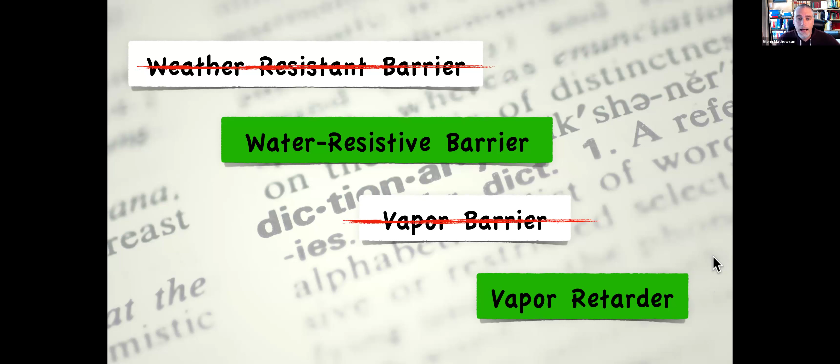Weather resistant, water resistive barrier. Let's start there. Codes have been around for hundreds of years, so in the long timeline of code, this is something relatively new. In the 2006 IRC, we got the definition for a water resistive barrier. You can read that on your own while I'm talking.

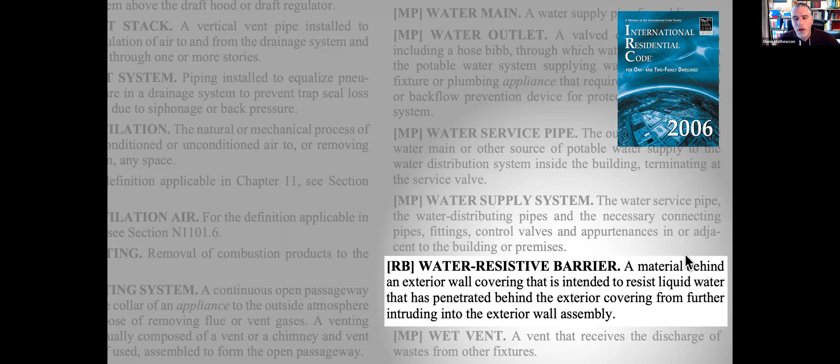But of course, you can hop into chapter 2 after this is over and read a lot of this for yourself. I always encourage you, any code that I bring up, write down a quick section number and go read it later on your own. I don't do a ton of just reading you the code, even when I bring up language like this. So here we see the section related to water resistive barriers.

And this is what we're going to find in the 2021 IRC. There were some significant revisions to this section for the 2021 IRC. So you get lots of details about how to install it and some other references. Again, read those things on your own. You're all professionals on this line, most likely.

What I want to talk about here, we've got these four different options. And the code is full of choices and options. That's something that, when the public doesn't dig in and learn the code for themselves, they love to use that line: the code is the worst you can build and still be legal. And as someone that truly understands the IRC, I find that to be somewhat of an ignorant statement, not really just not knowing the code.

Because if the code is the worst you can build and still be legal, my question is, well, which of these four choices that the code user can make, which one of those is the worst? So it just kind of doesn't make sense. The code gives lots of options and choices to those that choose to see the opportunity it provides.

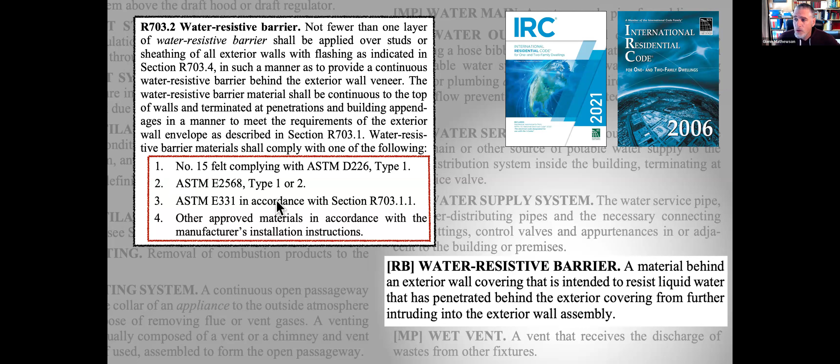So the first choice here that I want to talk about is number 15 felt, because this is, I guess I would say, the prescriptive method. This is the cookbook method, the simplified recipe to just build a house for your family or to sell to another family. That's a material you can buy at most lumber yards, home improvement stores, or construction suppliers across the country. And it's also very much a historical product as well.

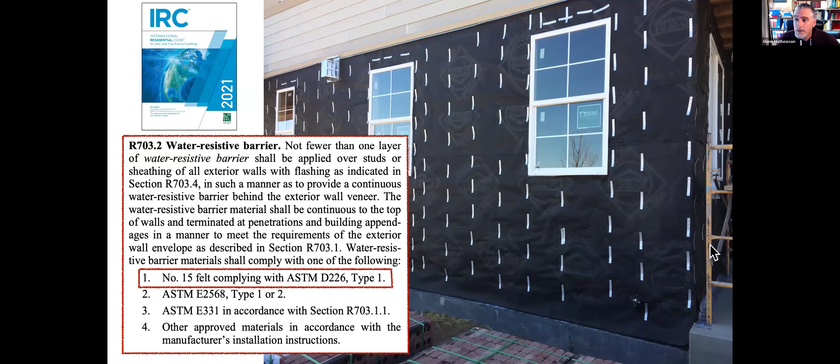And then we get into the other options, I'll talk about those in just a minute. So, number 15 felt water resistive barrier, right? I said this is kind of the historical product. So let's go back and look at this document I have that was published by a few different agencies and departments of the federal government back in 1950.

And look at the title of this book: Condensation Control in Dwelling Construction. Sometimes when you talk about building science and vapor management and vapor control and all this energy code stuff, it's gotten a lot of attention over the last decade, two decades. But it's not new. Here's a book about that subject, controlling condensation, from back in the 50s.

Just because the information was there and the research was put together doesn't mean that information was out to all the people and has become a mainstream understanding, which is why here today in 2025, I use this as a reference to kind of point back to a little bit.

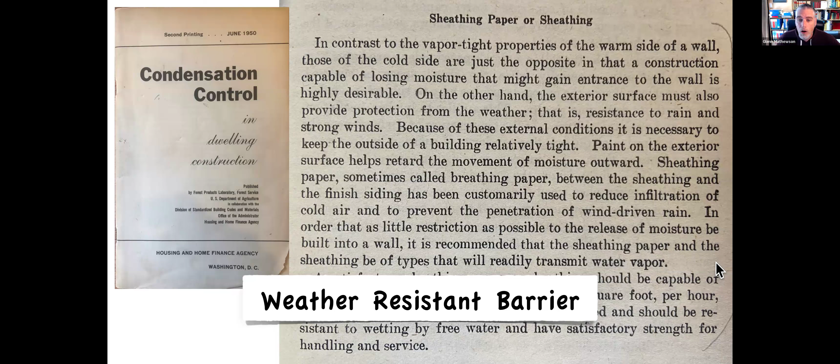So here's a section on sheathing paper, right? This is your felt paper, your tar paper, your water resistive barrier, as we would call it today. And I like this little statement. It gives us a lot of clues about how this was functioning for us in the past before all these new technological advances in construction materials, all the polymer based materials.

Every day there could be a new material coming out that's very proprietary, based on chemicals and testing and interlacing of atoms and stuff way above my head. And how are we affecting things without realizing we're affecting things? That helps us if we understand, well, how were things before all these new products we have?

So you've maybe already read this statement: sheathing paper, sometimes called breathing paper, between the sheathing and the finish siding has been customarily used to reduce infiltration of cold air. Hey, that sounds like what? An air barrier, right? And to prevent the penetration of wind-driven rain. Hey, rain, like, the weather. So we can see how in the past, this sheathing paper, we were sort of relying on to do quite a few different things than just today, where we kind of focus on just the water resistive barrier.

And we have all these other methods of creating our air barriers. But here we see 1950s. Yeah, we didn't want leaky homes either, right? We didn't want homes leaking air, but we wanted them breathable with breathing paper.

And that's one of the things, another point I'll try to get off in this class, is so many people compare a house, an airtight construction for a house, and they say, oh my gosh, that's horrible, this can't be so tight, a house needs to breathe. And they're relating the house to a living organism, right?

Like a human being breathing. How do we breathe? We breathe air, right? But isn't that kind of a bad comparison, to compare a house, a shelter for a living organism, and then try to compare that terminology to the living organism itself? So, as we're going to see here in a little bit, I don't think that's a good comparison.

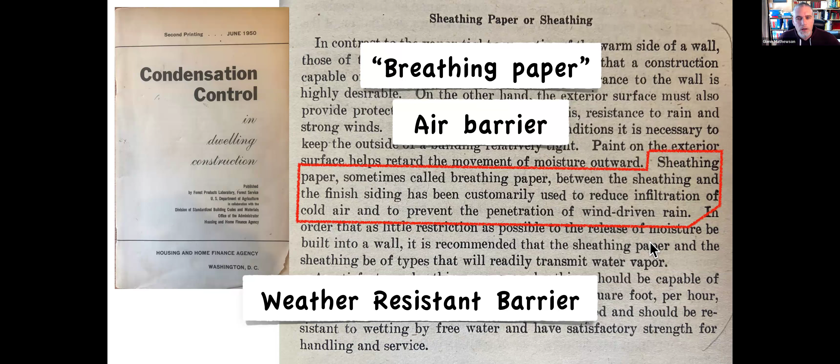It will allow water vapor to diffuse through it, and it will allow our sweaty bodies to dry via water diffusion, vapor diffusion, as opposed to air movement. So my goal to drive into you guys today is, yes, a house needs to breathe, and it can be as airtight as you want it, because a house doesn't breathe the way a human breathes, right?

So here we have 1950s, put on your weather resistant barrier. It's going to do all these things for us: prevent wind driven rain, act as an air barrier. And then as we get through the evolution of code, we can find kind of a strange one in the 2000 IRC in the section on siding. And suddenly it tells us now no sheathing paper is required. There's a various number of sidings here where it'll tell us no sheathing paper required at all.

When I jumped into construction in the late 90s and moved on to framing homes and doing work for the home builder, we were putting homes in Arvada. We were building homes with OSB sheathing, and we just put the window right over that piece of Z metal flashing on the top, and then put masonite siding directly over the OSB. No water resistive barrier, no sheathing paper at all.

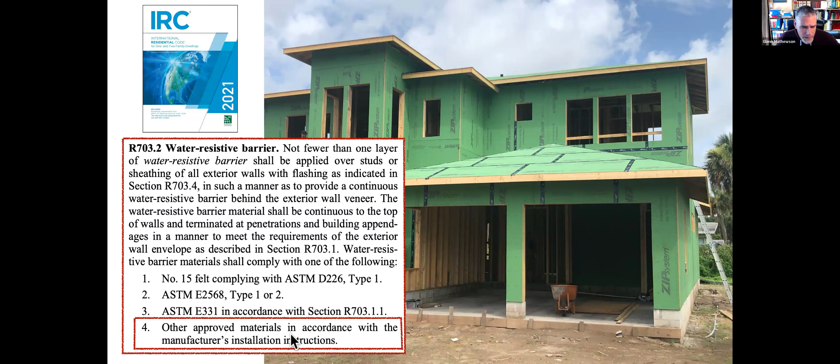Well, approved is acceptable to the building official. So what this means is, the way I like to present this is basically like a now hiring sign. The code is essentially saying, hey, currently on staff here, we have number 15 felt, we have windows and doors, and we have EIFS systems. And they're all performing the job wonderfully for us to provide a water resistive barrier.

But we're always looking for new staff members to join our team, right? Now hiring. But what are we going to do if we were hiring a new staff to the building department team or to your design firm? You would want to find out what their qualifications are. You would say, hey, can you provide me your resume?

Right? So the building official would want - what would make it acceptable? Well, show me your qualifications. Show me your test information. Do we have a standardized ASTM test? Is it referenced in the code? Is it not? Do you have alternative tests, like through ICC-ES or through other providers of code compliance testing and reporting? And so then the product can show you that resume that they're qualified.

This other way of doing it is qualified to do the job. And now as the building official, you can say, yes, you can join our team for this project and go ahead, you're a water resistive barrier. And then in doing so, hold on, there's other stuff we might want to think about, right?

The felt paper, well, that was conventionally an air barrier as well, right? It would keep infiltration of cold air. So it might be a good time to go, all right, what other features, how is this alternative functioning in these other applications that the standard materials...

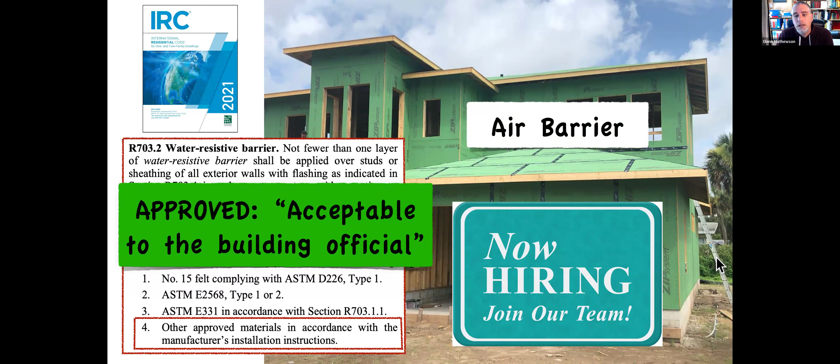have been functioning for us since the 50s or before. So is this material an air barrier? Yes, no, that's for you to find out in reviewing the resume and how that then plays in with the whole design of the exterior wall assembly.

And what about breathing paper, right? If suddenly we're shifting from using a 15-pound felt that is a breathing paper allowing moisture or water vapor to pass through, are we going to be doing something? Are we going to create any negative effect if we replace it with this other product, this other material? So it might be good for the designer to find that out, to ask the question, hey, how is this affecting air movement? How is this affecting vapor diffusion?

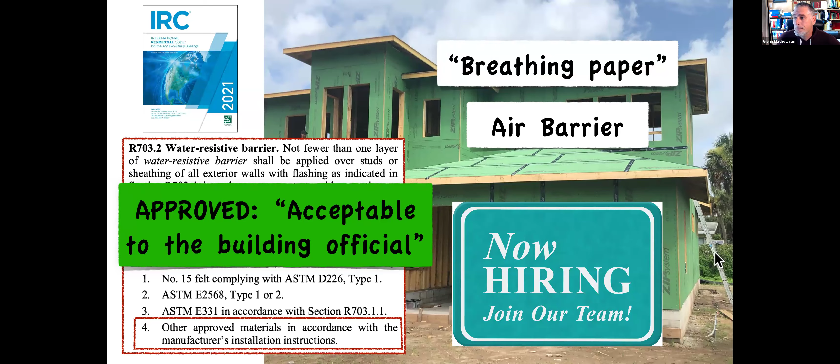So there's some little tidbits on the weather resistive barrier, the water resistive barrier, and what other functions it might be providing or could provide. Next up, we have the vapor barrier, now vapor retarder. Like I said, from the 1950s you can see here, that was the term vapor barrier, vapor barrier, vapor barrier. And that's still a term used today in a lot of non-code professional conversations and professional documentation. And that's okay, but in the code we don't use this term anymore.

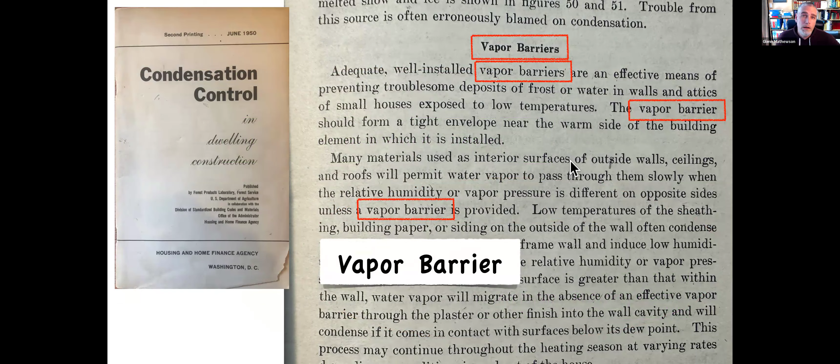So let's talk a little bit about vapor barriers, vapor retarders, vapor diffusion, in a very quick nutshell here. There's this website I've found, dpcalc.org, but you can find lots of websites that provide little dew point calculators. This is just a very simple dew point calculator.

68-degree air temperature, that's the temperature of the air. I set it at 68 degrees because that is the minimum required heating for habitable spaces since like the 1992 code. So that kind of gives us a code-based example temperature, right? We've got to at least heat the home inside to 68 degrees. And then you can set the slider here for the relative humidity, and I set it at 45%.

And I got that from the ASHRAE Handbook of Fundamentals. They have this chart that they've adapted from some health and medical science and documentation. These folks, in a whole different lane than me with code, have said to us, hey look, if it's too dry or too humid, you create worse environments for all of these things that we don't want to live in, these environments that aren't so good for the occupants.

And so if you look at their range of the optimum zone, very center of that is 45% relative humidity. So that's why I've used that over here in this slider. And what that results in is a dew point temperature of 45 degrees, saying if 68-degree air at 45% relative humidity touches a surface that's 45 degrees or colder, it's going to now be 100% relative humidity. We're going to make that air colder. The air can't hold the same amount of water anymore, and we're going to get condensation, which is not what we want.

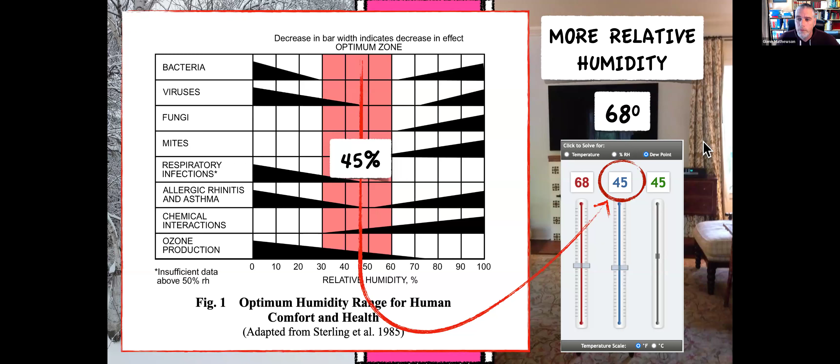We don't want liquid water forming inside of our assemblies or absorbing into our wood materials inside our assemblies. So if we look at an old-fashioned, just typical wall dating back to the 50s, you've got some gyp board on the inside, you've got some sheathing on the outside, and these are just example numbers. 68 degrees inside - it's more. We have more relative humidity inside than we do outside.

Outside it's cold and it's drier, and the colder air can't hold as much humidity either. And so we can see we have this temperature gradient through the wall. One side of the wall is 68, the other side is 30. This doesn't just happen at some single magical point; this is a gradient of those temperatures. As you move through that wall assembly, you're getting colder and colder and colder as you go to the outside of that assembly.

So here we have no vapor retarder on this. We're having vapor diffusion pressing up against this wall, and it's going to pass right through that material - lots of humidity, since we didn't have any vapor retarders or barriers. Now if we look in here, all right, we've cooled down the air, so I picked the number, say 56 degrees. Colder air won't hold as much relative humidity, so that means we would actually have more relative humidity of the air. But we probably did block or slow down some diffusion through here, so I've kept it at 30 just to keep this simple. We can see how the colder air has lowered that dew point temperature down to 25 degrees.

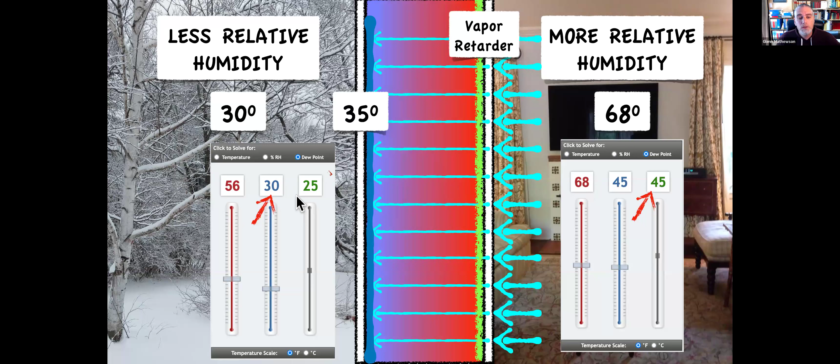This means we can now tolerate a colder surface. And that's a good thing, right? Because if that humidity hits those cold surfaces inside of our walls, we're going to get the condensation. So now we can tolerate a colder temperature. And look, it's not that cold, it's 35 degrees. So great, no more condensation, right? We controlled the condensation.

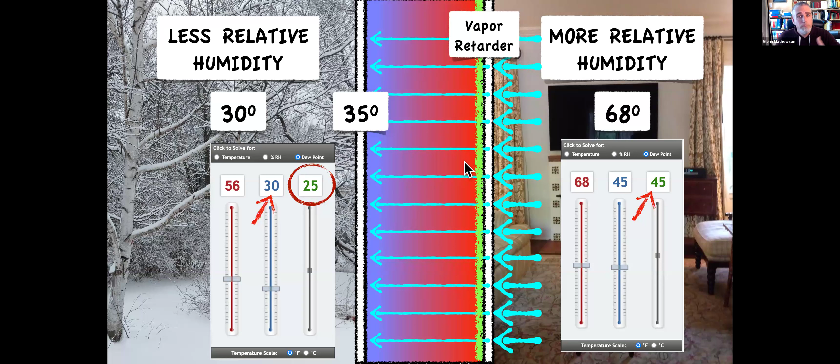And that was working in the 1950s because look, there's not much other stuff to this wall, is there? There's no continuous insulation, there's no spray foam, all these things that change these properties of permeability compared to what we were used to with the quote 'breathing paper.'

So we can come in here, we can see now in the 2021 IRC, we've got vapor retarder classes, and we've got 3 classes of vapor retarders. And I'll take you through and show those in visual form in just a minute.

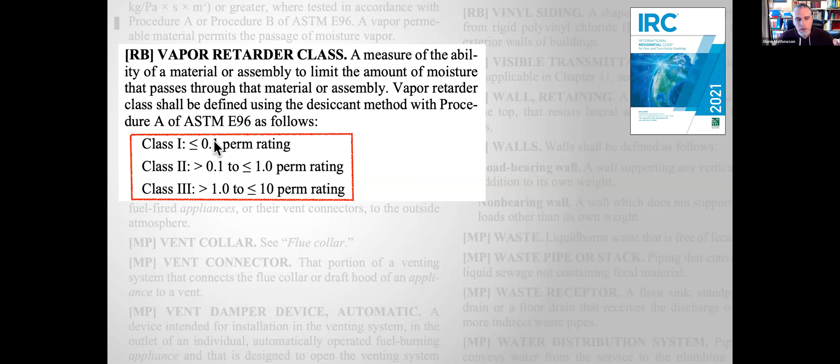But I want to point out an important thing here. Anytime the code refers to a class of vapor retarder, class 1, class 2, class 3, that immediately tells us that the perm rating, the permeability of those materials within these ranges, was determined using the dry cup method of ASTM E96. There's a dry cup method where it's testing the material in a more dry environment, testing it going from 50% humidity to 0% humidity, and then moving through the tested material.

And we'll see here in just a little bit, there's also a wet cup method. And that tests material when it's in a more wet environment, moving from 100% humidity down to 50% humidity. I've got another slide to get into some details there.

So this is when I bring up one of my little bumper sticker sayings, my little quotes in code. And one of my sayings is, test standards support freedom.

So back in the old days, it would tell us exactly what you needed to use. It would say, use 15-pound felt, use a poly vapor retarder, a plastic-based vapor retarder, things like that, giving you only one choice of material. And that doesn't really promote much freedom, right?

But a test standard says, hey, go be innovative, go be creative, new technologies, new materials, new ideas—test them according to this standardized test. And if they can provide the perm ratings between these ranges, then guess what? The code says you're hired, come on board and do the job for us.

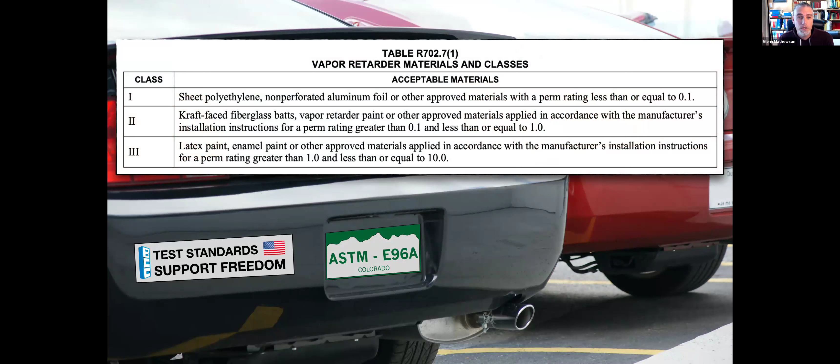So here's what we get now, though, in the 2021 IRC. We can see that we have more options in there: Class 1, Class 2, Class 3. And look, there's lots of stuff listed like sheet polyethylene or non-perforated aluminum foil, fiberglass batts, vapor retarder paint.

So it's still giving us an easy recipe, right? Remember, we're trying to build a basic home. It's like a cookbook making green bean casserole, let's just follow the recipe. It tells us to buy some of these materials. But remember, what does this say? Or other approved materials, other approved materials, other approved materials.

Remember that now hiring sign? In this sense, for acceptable to the building official, you're given a little help here on the license plate. How would you approve other materials? How would you review their resume? You would say, let me see the results of your ASTM E96 testing, let me see that you've got your material listed to that, and that you comply with that testing, and that's how you derived your different permeabilities, perm ratings, to get your class.

Okay, so yay, test standards allow for more innovation. And that's something, test standards promote freedom. Most people would think I'm crazy because it just sounds like another rule, doesn't it? Well, sometimes it's important not to just look at rules as restrictions, but see if sometimes these rules actually open us up to other avenues.

So these are my easy to remember terms for these different classes of vapor retarder. A class one vapor retarder is 0.1 perm or less, like poly, your sheet polyethylene. That's the classic vapor barrier. And this is where you're still going to hear folks outside of just the code lane referring to vapor barrier, and that generally now is going to be speaking to a class one vapor retarder, vapor barrier. But remember, by the code, it's just a class one vapor retarder. So poly, that's an easy thing to remember, but never forget the now hiring sign.

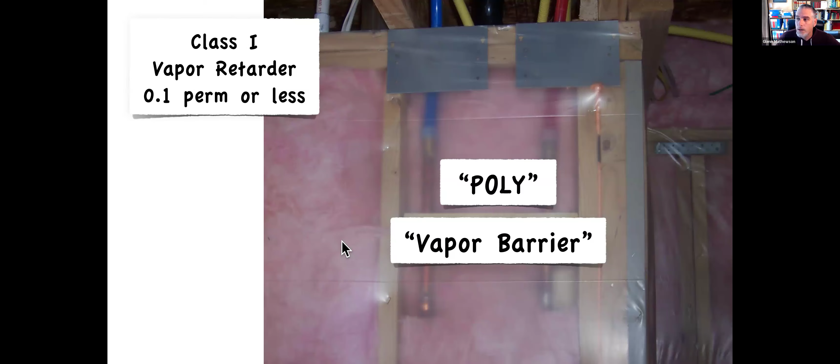And then our class two vapor retarder is greater than 0.1 perm up to 1 perm. And an easy thing to remember is paper, right? Poly and paper, easy to put together. But of course, the now hiring sign, never forget that.

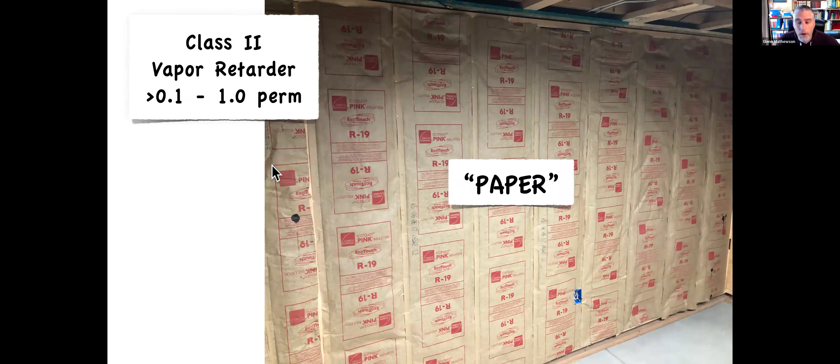In the 2000 IRC, here's where we have another thing to clue you into why there's a lot of disconnect. A lot of people have different opinions and different understandings of vapor control, and it has so much to do with this history and how these things have evolved. So if we were to go back to the 2000 IRC, we wouldn't have three classes of vapor retarder, we would just have one definition, vapor retarder. And in that code, a vapor retarder, or someone might have called it a vapor barrier, it was 1 perm or less.

And that means it included class one and class two back in the 2000 code. So where we've evolved, getting more specific, is we've now broken apart just vapor retarder as being 1 perm or less, into two separate categories. So now we can look at poly and paper separately. And this one doesn't tell us, in 2000, was it a dry method? Was it a wet method? Well, that doesn't help us a lot, especially with the movement and much more specification we have now on this subject in the modern code.

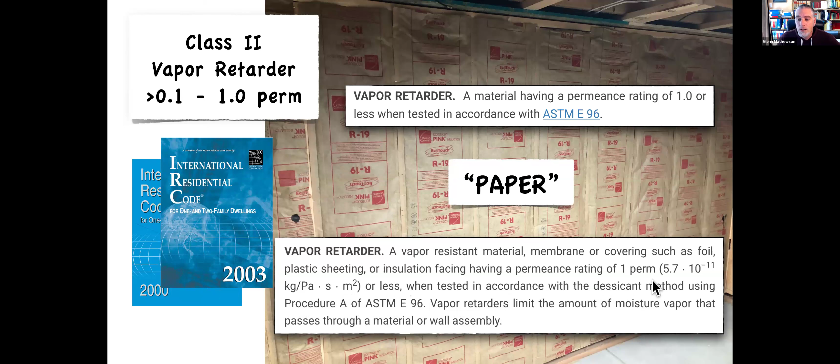So we can see in 2003, just a quick note, the definition changed again. And this is where we now see the reference to the desiccant method, which is also the dry method or procedure A. There's a few different terms used for that: dry cup, dry method, desiccant, procedure A. And so 1 perm or less. And now we can trace this history all the way back to that 1950s book.

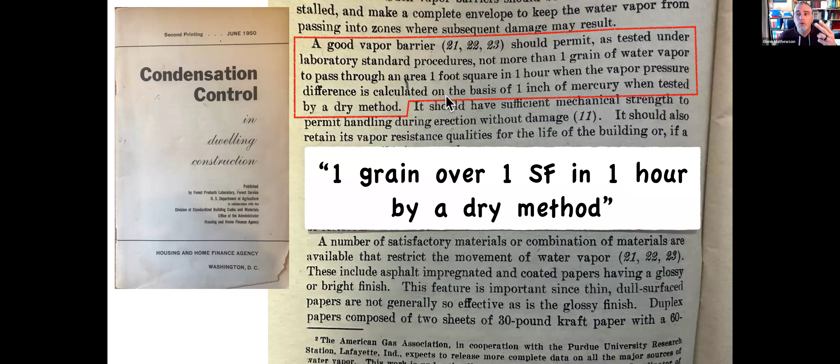Because what does it tell us here, right? A good vapor barrier should permit, as tested under laboratory standards — now we have a reference for that test, ASTM E96 — not more than 1 grain of water over 1 square foot of material in 1 hour of time by a dry method. So, in this time, and this might be in a lot of people's brains still, a vapor barrier, 1 perm, well that would be equivalent to class one and class two vapor retarders today.

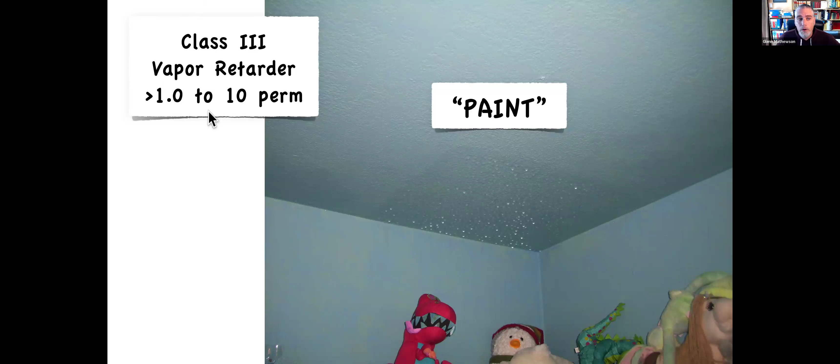Now for the biggie. The big change with this is recognizing paint as a vapor retarder. Paint, just a simple term. There could be other materials constructed to do a class three vapor retarder, but I try to keep it easy, right? Poly, paper, paint. So a nice summary to help you understand class one, class two, and class three. A class three vapor retarder, paint, that's going to be greater than 1 perm and then up to 10 perms.

Here's where I feel like I have to point you to this definition in the IRC. It's been in there since 2000, and it's about what does it mean to be vapor permeable. Vapor permeable means 5 perms or more, tested under procedure A or procedure B.

In my bigger class, I can explain that the IRC is Frankenstein's monster. It's been put together by parts and pieces of different people over different periods of time. We have stuff in the IRC from people living in the 1920s, before my father was even born, and parts of those people are still in this Frankenstein's monster of our IRC.

What I've discovered through my research is this really does not have any real relevance to vapor management in our building assemblies at all. This is kind of a dated definition in terms of its use in understanding parts of the code.

When you get to appendix chapters, like for straw clay construction and hemp-lime construction, you'll see a lot more discussion of vapor permeability. But those are new, just in the last few editions, whereas this definition is something that's been in there a while.

But something to keep in mind: if it's 5 perms or more, we're definitely seeing it as vapor permeable, even though between 5 and 10 perms we're still calling it a vapor retarder. You see how it's kind of hard to teach that without explaining that the code's not perfect.

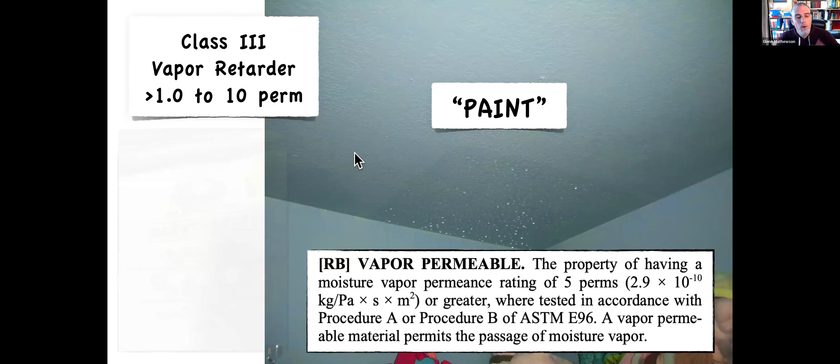Anyway, paint really is getting us to this idea of being breathable, being able to dry. When we're looking at the dry cup method, the classes of vapor retarder—class 1, class 2, class 3—under dry cup, being 1 perm or less for class 1 and class 2, the goal there is really to keep water vapor from diffusing into our assemblies.

But then we might want the water vapor to be able to move out of our assemblies and dry out, right? Just like if you're wearing a few too many clothes and you get hot and sweaty, you want those clothes to let you dry out. So the idea of paint is really pushing us towards this idea of drying, of getting back to being breathable.

This is a Google image search of a term. I love searching with images because it gives you a taste of what the general public is talking about with certain terms. There's this term that was coined not too long ago, a smart vapor retarder. That was the term coined by the public in sort of creating this concept. And someone said, well, let's get that recognized in the code.

So you'll see something coming in our 2024 edition of the IRC, a term called responsive vapor retarder. I encourage you to go read these definitions—you can read all the ICC codes for free at codes.iccsafe.org. So even if you don't have a paper copy or your own PDF of this, you can go read it online.

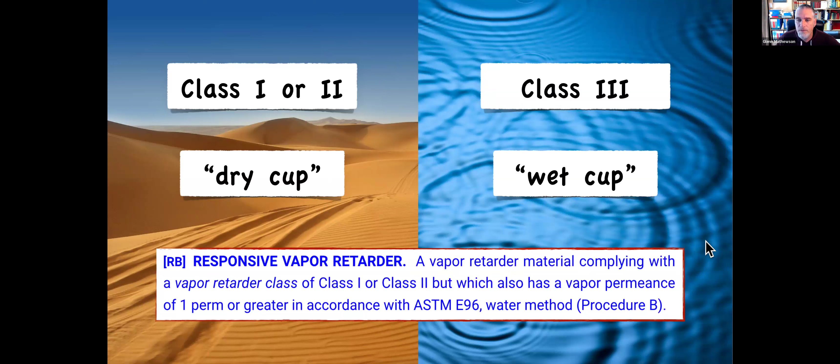So this is an important new movement we're seeing in this vapor control design. And that speaks back to that breathing paper, right—sheathing paper, often called breathing paper. If we look up the material properties of this material, we'll find that breathing paper is dry cup, 5 perms. Hey, isn't that the definition for vapor permeable? Even in a dry cup example.

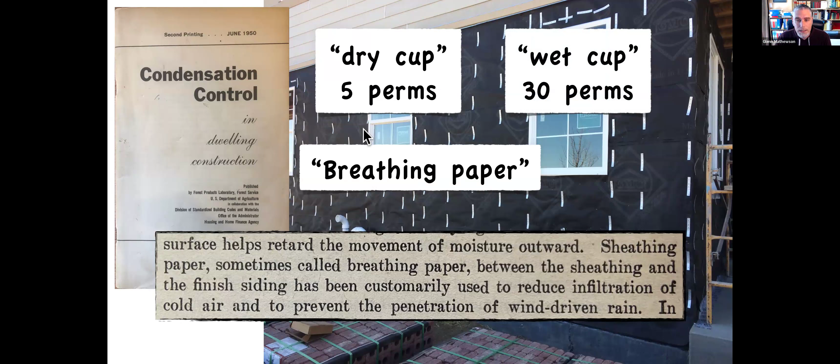But then in a wet cup example, hey, we got a leak into the wall, or somehow we got condensation in there. Now we got this wetness in the wall. That's going to open this material up even more under humid conditions, upwards of 30 perms.

Just quick note, I found that information at buildingscience.com. That's a very, very reputable site with building scientists there that are world renowned. So again, I'm not going to point you to a site that's Billy Bob's backyard building science. I mean, unless Billy Bob's got some serious reputation behind him.

So this is something you can search online. I find it to be very useful because I am not an expert in material properties, right? But that's part of understanding code. So I'll utilize this as well as some other sources to help me understand our values and permeability of different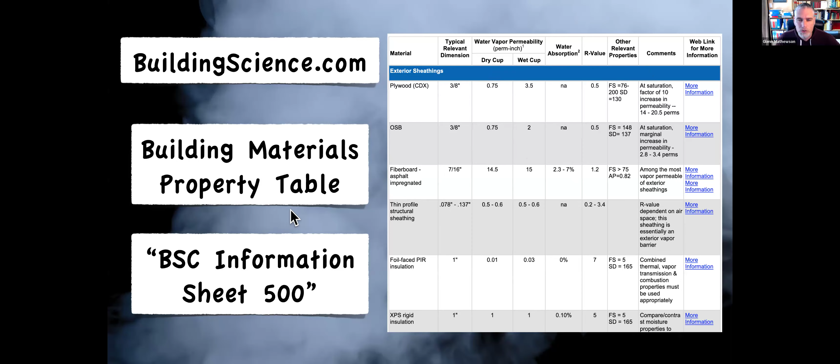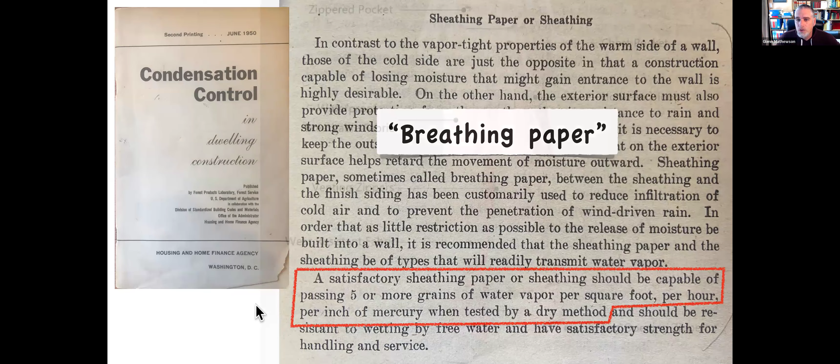So this is my favorite way to kind of break down all these different control layers for the house. I mean, it's Colorado, right? So we got snowboarders like me, and then we got some of you dorks out there that ski, but whatever. I'll still bring you into the fold. We're still snow riders. That's cool. What do we have here?

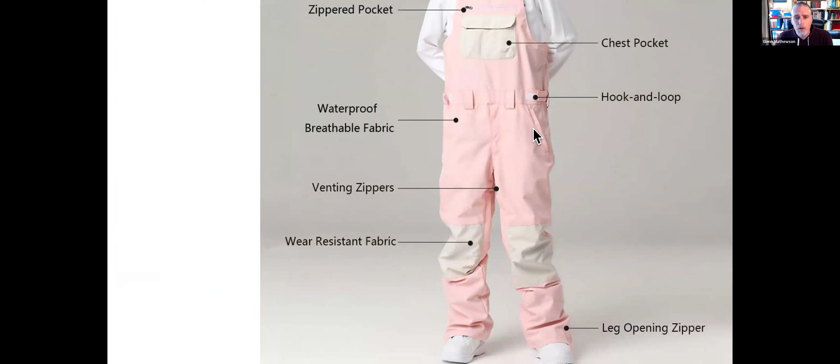We have a shell, bib pants to wear. And so what do we get? Waterproof, right? We don't, so it's going to be slushy spring riding soon, and we don't want all that wet melting snow to get our clothes wet and our bodies wet. So we have a waterproof shell. That's our water resistive barrier.

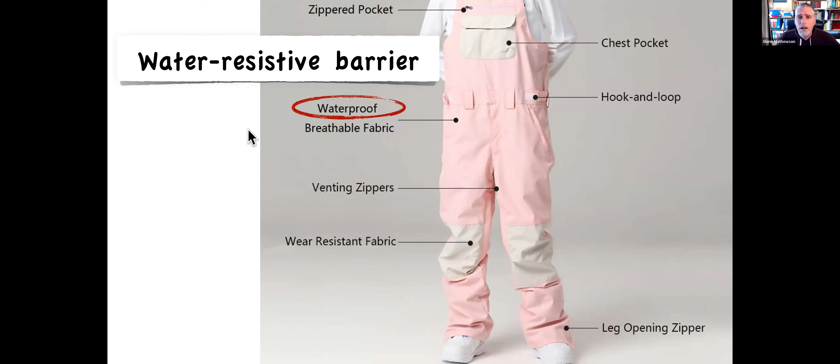But remember, it's springtime. We're getting hot and sweaty underneath this stuff too, right? So we want that to be a breathable fabric, right? That doesn't mean it's air movement. That means it's vapor permeable.

But then sometimes you're really hot, right? And just drying through the fabric's not enough. So we really want to ventilate. We want to open some windows and really just let that cool air come through and ventilate out the house, right? Or ventilate out our bodies.

So these clothes have venting zippers, and these venting zippers are often in our most humid locations, right? And I can relate that to where do we see exhaust, additional openings for ventilation, kitchens and bathrooms, kind of like our armpits and our crotches, right? I mean, sorry for the TMI, but it fits, right? The shell of our homes are for shelling a human body, just like our clothes are. And so these are put in wise locations, just like exhaust in kitchens and bathrooms or windows.

And then, wear resistant fabric, right? We're gonna maybe be on our knees a lot. We're getting physical damage against physical impacts and physical scraping of crusty, icy snow where we might fall on our knees. And that would replicate, right, our cladding, because the water resistive barrier is kind of protected first behind this physical protection of our cladding.

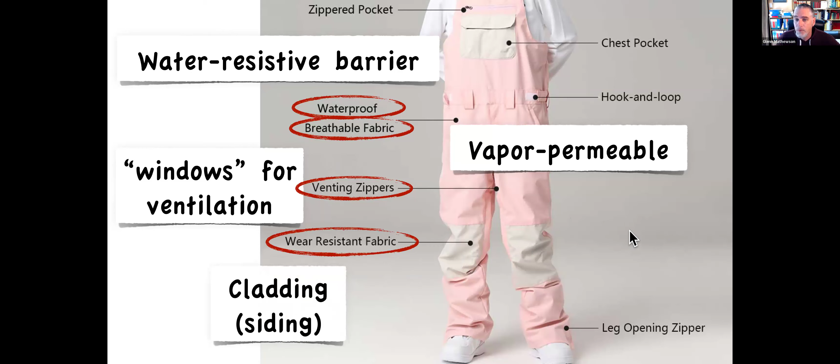So all of that is IRC. All of this, you're going to buy this part of your snowboarding or skiing outfit out of the IRC store. And you can make lots of different choices in how you want to do this. But you might now want to be warm, right? As a human being, it's cold up there. You want to be warm, so you want thermal insulation.

And that may be a different layer. That's how I do it. So I can adjust and adapt my shell, but I can also adjust and adapt how much thermal insulation do I need based on climate zone, right? Is it deep in January and it's just cold up there on the mountains? Or is it warmer later? So we can even compare that to kind of climate zones where we would change the thicknesses and the level of our thermal insulation. This is the energy code over here.

And this is what folks need to realize is just as you can buy 2 different pieces for this, you also need to make sure they work together, right? If your shell's too small, you may not be able to put a thick enough thermal insulation underneath. So just the same way when we're doing our envelope design, choices you make in vapor control, it's up to the designer to be sure that those mesh with choices that are made for thermal comfort and for energy code.

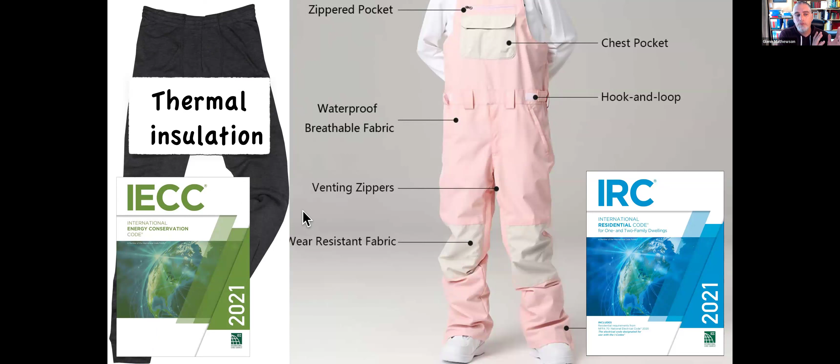And then just to wrap this up for fun, right? Venting zippers you have to open by hand, like a window you have to willingly open to ventilate.

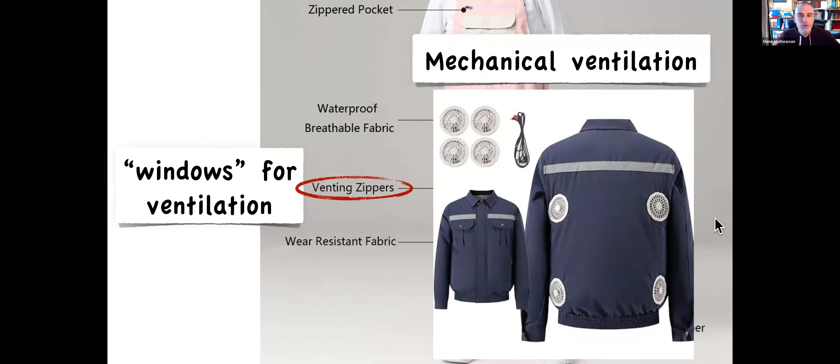But what are we moving to now in our control of our environments? Mechanical ventilation, whole house mechanical ventilation. So that would be like this funny jacket I found online, a jacket that has fans built into it, so you don't have to open your windows or your zippers. You have the mechanical ventilation in there. So clever.

Okay, so let's see about this disconnection. It's been around forever. This is a book I have from the 1940s, and inside this book there are 3 sections. It talks about vapor permeability of materials. And where do you find that? Well, obviously in the materials chapter, telling us about the properties of materials.

But in this 1940s book, it also talks about thermal values of insulation materials, R values, U factors of insulation materials. And you might think we'd find that in materials, but we don't. We find that in the occupancy part of the chapter. Why? Because that's what we relate to. We relate our thermal underwear, our insulation, that's all about us, right?

That's about us, comfort and cash, the occupancy from the human being. They're not worried about the condensation happening inside the wall. That doesn't get the forefront attention. And so we see the same thing in the IRC. All of our vapor control stuff comes out of the other chapters of the IRC. I'll do a slide for that in a second.

Thermal comfort, thermal control, R value, still an occupancy focus, right? That's really how you're going to sell the house to the new home buyer, how great this is for your energy bills. No builder's going to say, 'Oh, this house is amazing because it manages vapor inside your assemblies.' That doesn't get you your house sold. It didn't back in the day and probably wouldn't today.

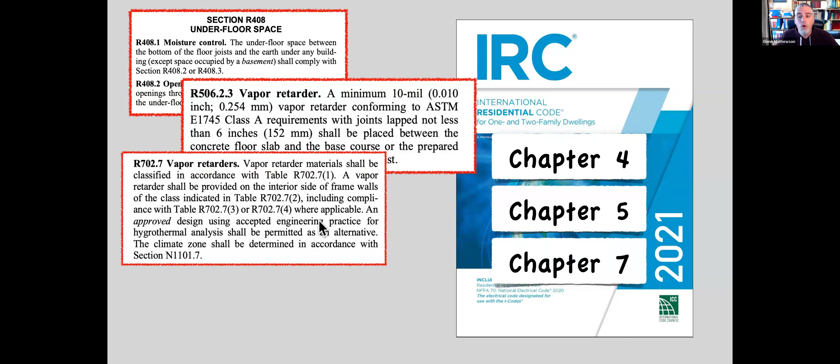For walls, that's going to be chapter 7. And then if we want to talk about it for roof or floor, roof ceiling assemblies or attic assemblies, now we're jumping into chapter 8.

So now let's talk about air leakage a little bit. What is air leakage doing for us? Well, air leakage is moving water vapor. Nobody cares. All right, what else is air moving? Air's moving heat, right? It's leaking heat. And now we've got the attention of everybody, comfort and cash. And so we see all that focus on insulating the building.

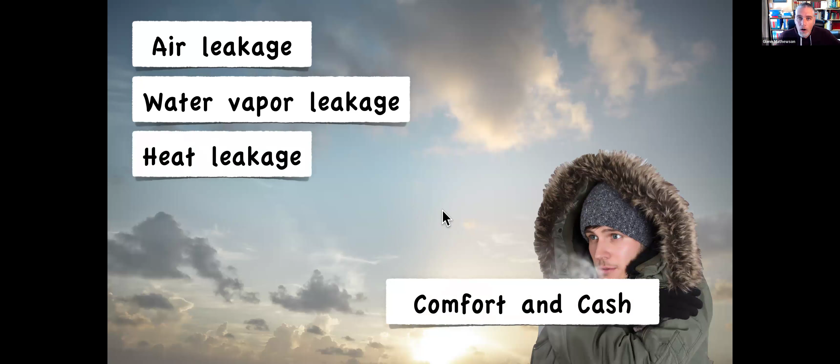But what does all this insulation, how is that actually affecting our vapor control? And I'm short on time. Like I say, I obviously have a hard time with these 60-minute things. I'll keep working on that.

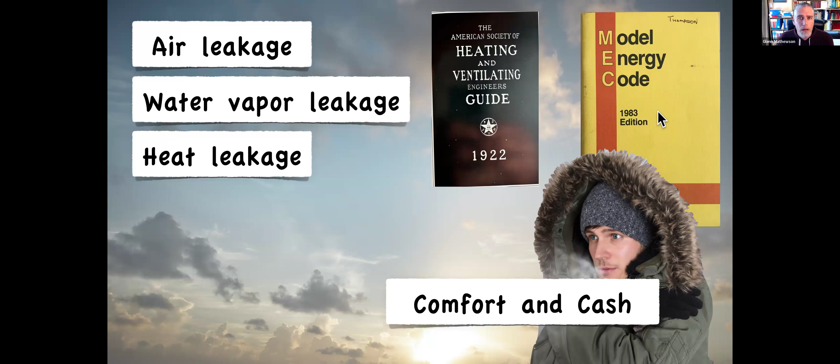So real quick through, I'll just talk about air leakage. It's been a discussion back from 1922 for the American Society of Heating and Ventilating Engineers. We had it in the model energy code before we had the international energy code. Air leakage is an old subject, over 100 years old. And of course, we have it in the IRC starting off with that 2000 edition.

So energy code telling us air barriers. But in that 2000 edition, we also had these other chapters. This was in chapter 3 at the time, saying all of the assemblies, floors, walls, ceilings must have a vapor retarder. And the exception to that was if they're ventilated. So we could get away from a vapor retarder for the attic because we could ventilate attics. We can ventilate our crawl spaces, so we could get away from vapor retarders there.

But what about wall assemblies? Well, historically, conventional construction doesn't ventilate the wall assemblies inside. So we would have mandatory vapor retarders, right? And that was class 1 or class 2 at that time. And it told us to put that on the warm in winter side. Okay, warm in winter side, vapor retarders in all walls. Well, what was the goal of that, right?

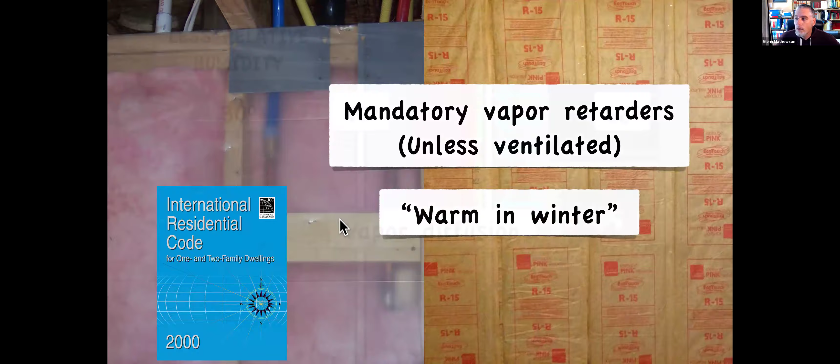We've got this uniform vapor load pushing against the wall, and we're going to reduce the diffusion coming through. But let's say we have an electrical box, or a gap or a hole cut in our vapor retarder. At that little spot, it's not going to restrict vapor diffusion, and you're going to get water vapor moving in. But the rest of the wall area did its job, slowing down vapor diffusion and acting as a vapor retarder.

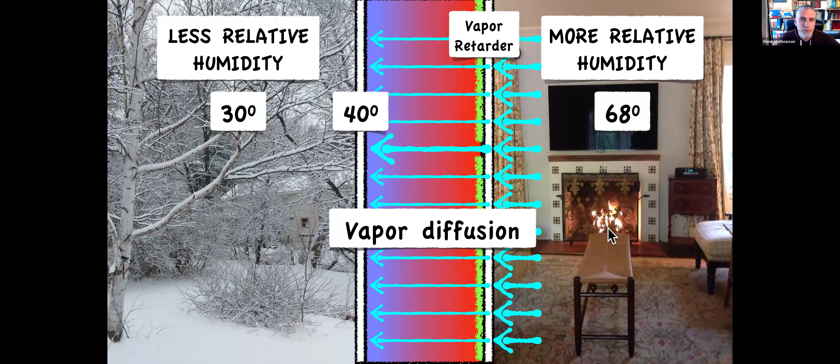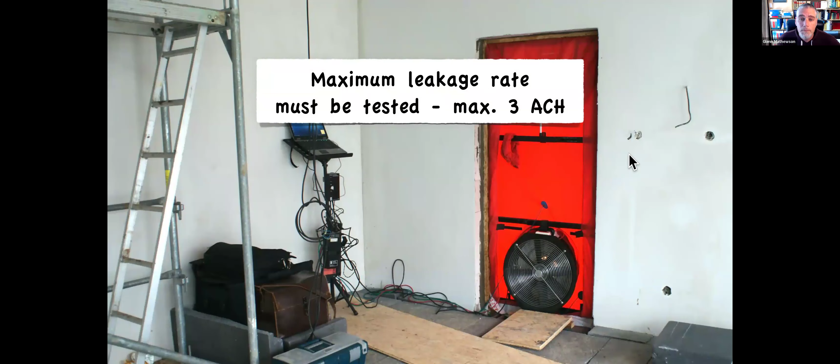So if we switch over now and talk about air leakage, because air is also moving vapor with it, we test our air leakage in our homes. Energy code requires blower door tests and limiting our air changes per hour. But this is from one side of the assembly to the other side. Back in the 2000 code, this section also told us about air leakage through the building thermal envelope, one side to the other, because it's all about our comfort, right? Energy code means I'm more warm and my energy bills are low. So that's not focusing on what's happening within the assembly itself.

So we've got our water-resistive barrier, say on the outside, functioning like an air barrier and limiting that cold air coming through. Or maybe in modern times you've put a proprietary sheet good that's sealed up, so you get your big time air barrier there, and you're going to pass your blower door test. But we still have that vapor retarder and that hole. And now we have air pressure inside pushing up against this wall, and of course the air is going to move right through where the hole is.

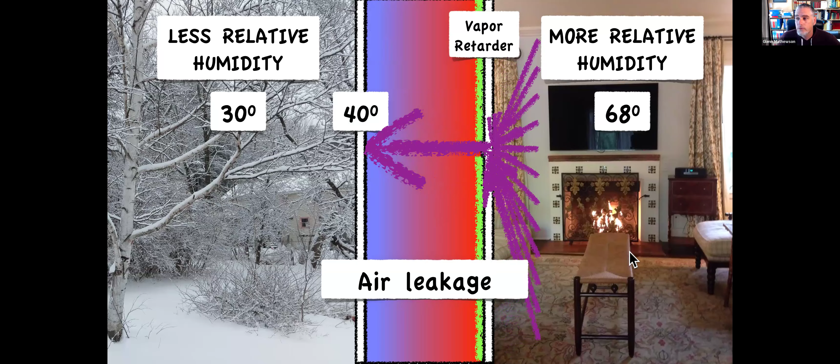But here's where it's going to act differently than vapor diffusion. All the rest of that air is also going to move through the hole. It's not going to be blocked by the vapor retarder or by the drywall the same way water vapor would be blocked. So we're going to get a ton of that humid air able to come through that hole, illustratively. Going back to my floor drain example, now let's look at air full of water vapor.

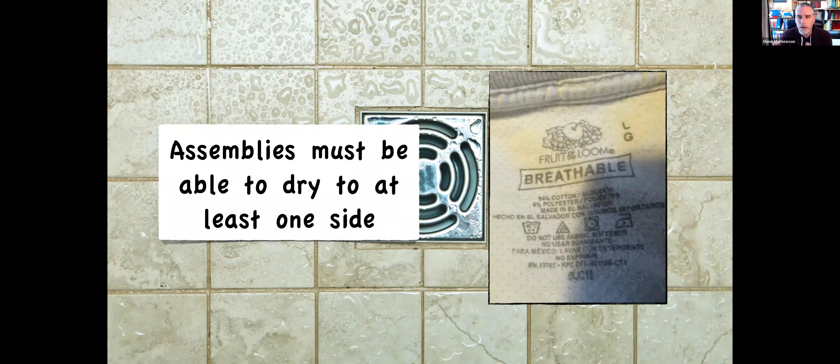Let's fill this floor instead of with sand, for vapor diffusion, let's put all this water on it. Well, what's going to happen? Even though we have a nice waterproof area all around that's going to block air and block vapor diffusion, for air it doesn't matter, because it's all going to go and leak right through that drain. And so this was the big realization we've learned over time: you've got to let these assemblies dry in one direction. If you put too strong of a vapor retarder up, the air just leaks right on through, which we're accepting is just too hard to stop. Or if you get water from a leak or any other source inside the wall, you're going to have a problem.

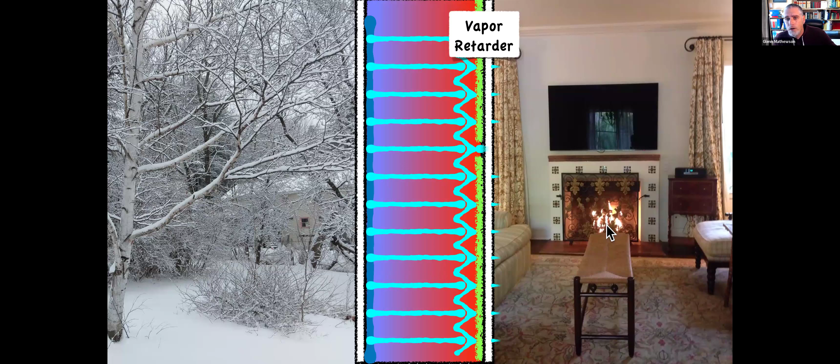And the vapor retarder is now working against you, right? Now that vapor retarder is super wet inside, and now it's inhibiting the ability to dry out. And so we found, well, that's causing some problems. But hold on, water vapor moves from high humidity to low humidity.

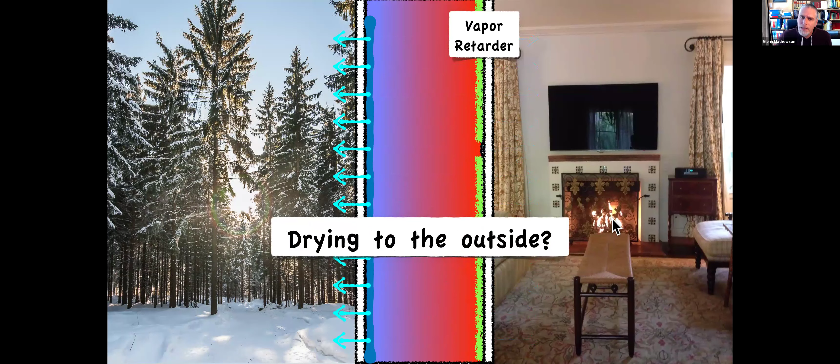So isn't that water vapor drying to the outside? Well, yes, historically it was. We had breathing paper, right? And it allowed water to release from the assembly, 5 perms or greater. But we had a lot of developments in technology since the 1950s, like plastic-based, foam plastic-based continuous exterior insulation.

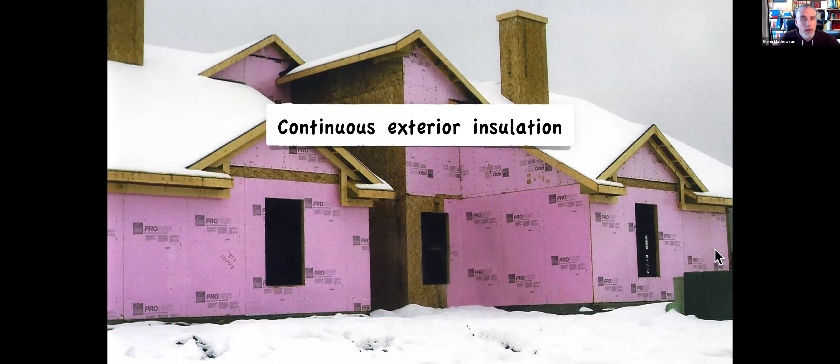And what's this for? Vapor control? Not when it first came out. We have it addressed now. This was about comfort and cash, right?

Energy code. So I remember back in the framing in the 90s in Arvada, a builder there wanted to build better code. They wanted to build a good energy efficient house. And the early energy codes, as well in 2000, had discussion about using continuous exterior insulation.

And in this time, it was focused on replacing your wood structural sheathing, your 1/2 inch OSB wall sheathing on the outside, and just replacing that with a foam insulative sheathing, leaving enough OSB, wood structural panel, to brace the house structurally, but then replacing the rest of that with foam insulation.

What are we thinking? Energy code, save money, let's be more comfortable. But how did we just change things without thinking about it?

That's now no longer a breathing paper. That's not 5 perms open and dry and 30 perms wet. Now that's likely a class 1 or class 2 vapor retarder in terms of the permeability of this conventional foam plastic sheathing.

But we did that for energy code, kind of forgetting, hold on, air might be leaking in here. It's a lot harder to do a good air barrier than it is to just put up a sheet of poly and block all that vapor diffusion.

And what did we do now? We created a vapor sandwich, as they call it. Now we don't have either way to dry. We can't dry to the inside and we can't dry to the outside.

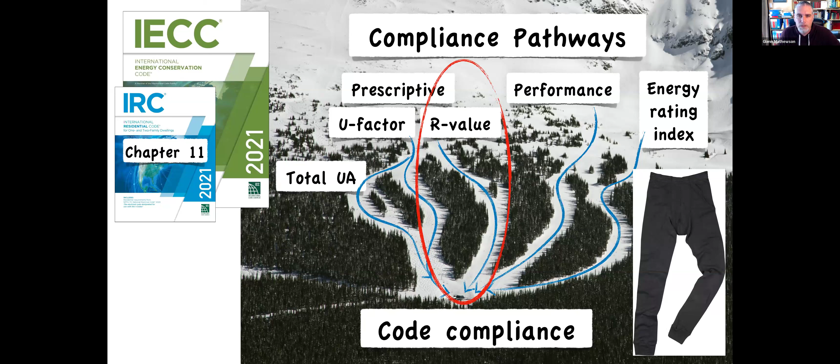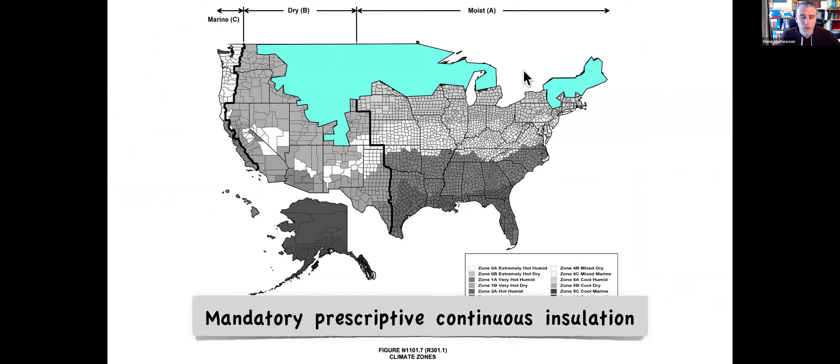The R value method. Prior to the 2021 IRC, the basic prescriptive recipe for thermal envelope requires continuous exterior insulation in these climate zones here, the colder climate zones. But we saw a big shift in 2021 that now brings down all of these climate zones, all looking for mandatory, required, prescriptive exterior continuous insulation.

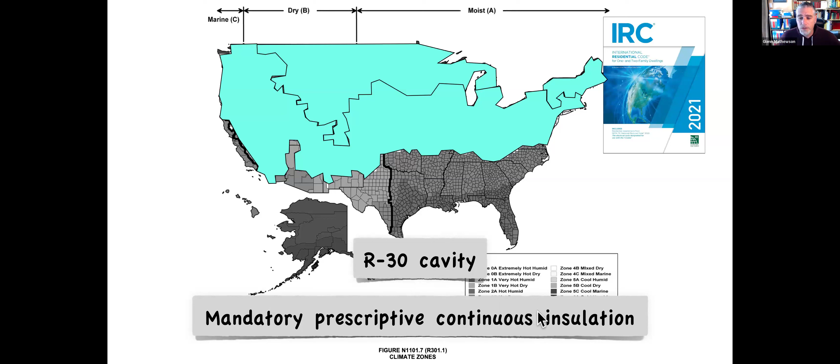Now, you can also do an R30 cavity insulation. So there is a little caveat there for cavity insulation, but either one of these has a pretty big effect on changing how we've been building these homes, right? Continuous exterior insulation is not a historically conventional method, putting that over the top of our wood structural panel sheathing.

So for the energy code prescriptive method, remember, I showed you, you don't have to do this method. This is just the easy one design method. It gives us here, in these climate zones, different combinations of cavity insulation with continuous: 2x6, R20 in the cavity, R5 continuous; R13 with R10 continuous, etc. Also a complete exterior continuous insulation method that has no cavity insulation.

So, okay, if we just start now throwing continuous exterior insulation up over the outside of these walls, is it a breathing paper? Does it allow drying to the outside? Well, that's a question for the designers to determine, and that's something for the third party authorities looking over that design to check up on as well. What are these materials you're putting on there? Because if you're still putting that class 1 vapor retarder on the inside, or class 2 vapor retarder, you're going to be back to having that vapor sandwich as I discussed before. And you'll be rotting homes out the same way we were doing it in the 2000 code.

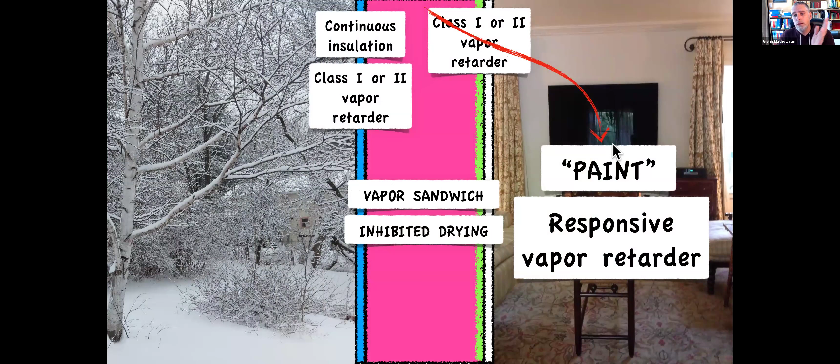So, all right, let's go then with a paint or a responsive vapor retarder. But the code knows we're going to be getting air leakage in here. No matter how much we try to control this vapor, air is probably still going to find its way, or moisture will find its way. So this is back to that.

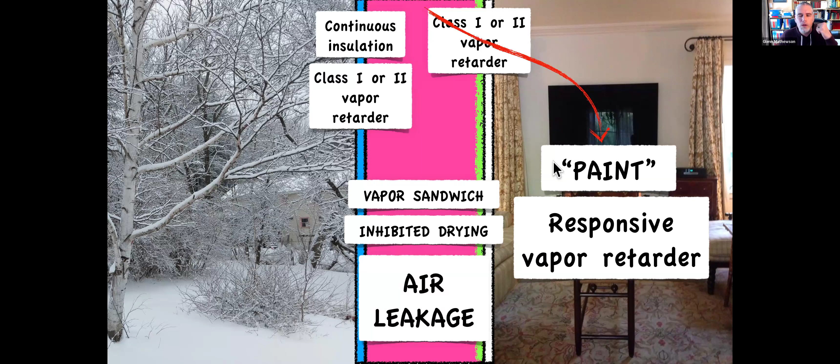We got to dry. We got to have drying potential. But going down to a class 3 vapor retarder gives us great drying potential. That's good, but it also means more humidity is now being allowed into the wall. So we've increased the wetting potential, right? We're now making it more likely to get wet because we were trying to help it be able to dry. So the code's saying, hold on, we need to balance that a little bit. We need to try our best to eliminate that.

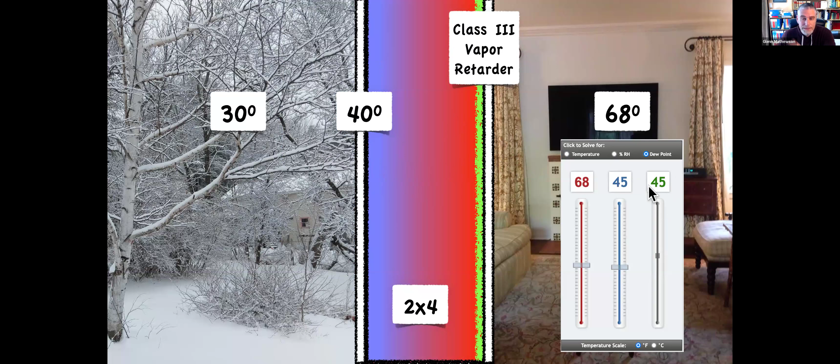So now in the vapor control code, for utilizing a class 3 vapor retarder, you've got to put a continuous exterior insulation. And you can see here, before we go back a slide, how there's that gradient of temperature through this wall, right? Really warm here and slowly getting colder and colder. And it's 40, so that means we're going to get liquid condensation because it's colder than our example dew point here. So the code says, all right, put continuous exterior insulation.

All right, vapor control, we got it solved. We've got the class 3 inside and we've got sufficient insulation on the outside. But now we decide I want to make a more thermally efficient home for the comfort and energy bills of that occupant, right? I already did vapor. Yay, checked the box. Now let's boost up our insulation and have a super thermally protective home.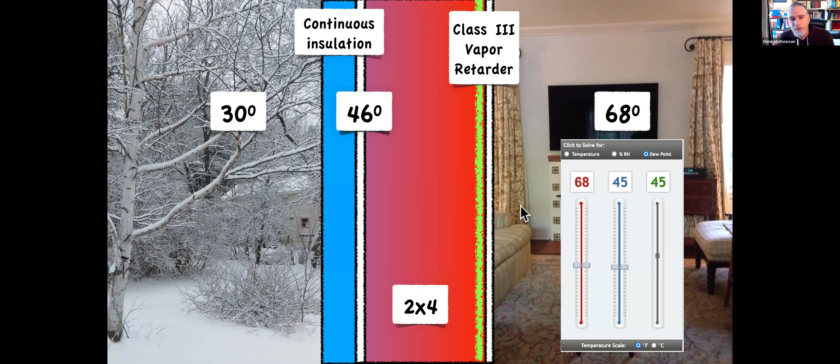So we're going to go to 2x6 framing instead of 2x4. Great, awesome for energy code. Bills will be lower. But what did we do now to that temperature gradient? Well, now we got to change that temperature gradient again because now we put more insulation on the warm side of that sheathing that we're trying to keep warm. And oops, now we have cold sheathing again. And now we're back to a higher potential of condensation to occur. So we got to go back and reevaluate our vapor control choices, right?

It's like if you put on super thick thermal underwear that might be too thick to fit underneath your shell, your bib shell, your vapor control shell. So you got to reevaluate that, right? Same, just for the analogy.

So what are we going to do? We're going to put more continuous insulation on the outside. And then again, now we change that gradient of temperature through the entire assembly all the way out to the cold outside air. And we're back up again. Condensation goes away and we've kept that surface warm.

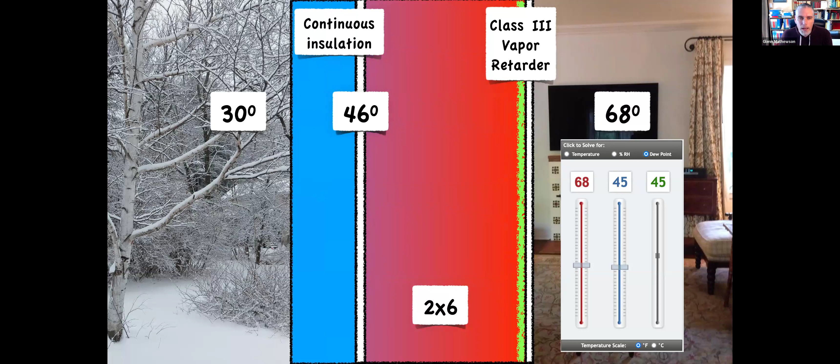So this is where for vapor control, I call it the battle of the dew point. For vapor control, this side is the heat gain towards our sheathing that we're trying to keep warm and above dew point temperature. In energy code, you wouldn't call that heat gain, you would call that heat loss, and you would try to limit it as much as possible, right? But this is vapor control. So this is the side that we want that heat to come through to some degree to get to this point.

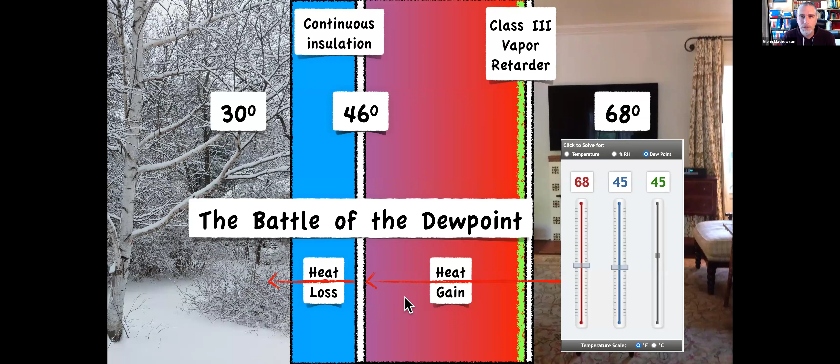And on the other side though, we have heat loss now. Oh, that sounds more familiar like energy code, right? The cold outside is pulling the heat out of our house and so we have to pay for more. Well, this heat loss is taking the heat away from the inside of the sheathing that we're trying to keep warm. And so for vapor control, these have to be balanced sufficiently that we maintain a temperature inside the assembly, not for our comfort, but for the building's comfort.

Okay, so let's see how this works when we compare it to energy code and we're trying to actually do a design. So chapter 7, vapor control. This is a table you get for class 3 vapor retarders. It tells us in climate zone 5, if you're going to have a 2x4 wall, you need R5 continuous over the outside. And if it's a 2x6 wall, you got to bump it up to R7.5 on the outside. But what does this mean? 2x4 wall, 2x6 wall—everything I've been showing you has been referring to insulation, blocking the heat from getting to where we want it, the inside of our sheathing.

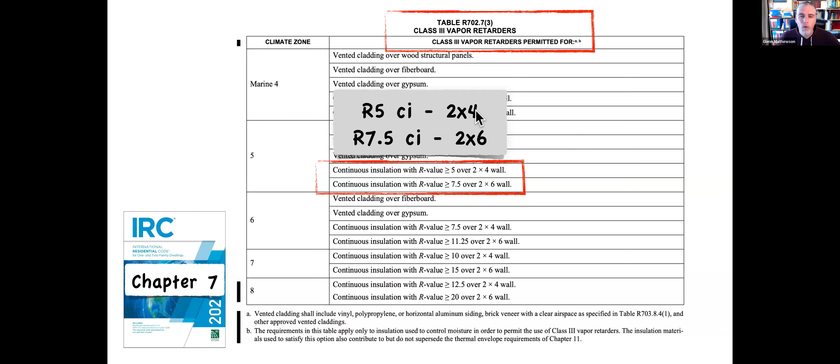This is where I'm a little critical of the code. I think there could be some adjustment in the future that might make this more understandable. This isn't worried about the air space inside the wall or like somehow the 2x6 stud has a different effect than a 2x4 stud—that's not the science behind this. What it's trying to say is it's assuming you're going to have R13 in the cavity of a 2x4 wall, and R20 in the cavity of a 2x6 wall. So it's saying, if you have this much insulation keeping the heat away from that surface, you need a certain amount of insulation on the outside to retain whatever heat you do get on that surface. It's focusing on what maximum insulation would be designed inside there, R13, R20, based on these cavity values.

So this is vapor control. But now let's go look at energy for thermal comfort. Now it tells us R20 cavity with R5 continuous. And this is where a lot of folks, especially in the public, go, oh, this code is so stupid, it doesn't even make sense. What are these people doing? Look at how dumb that is. It says R20 cavity with R5 continuous, but then for vapor, it's R20 cavity with R7.5 continuous. Who's writing this stupid code?

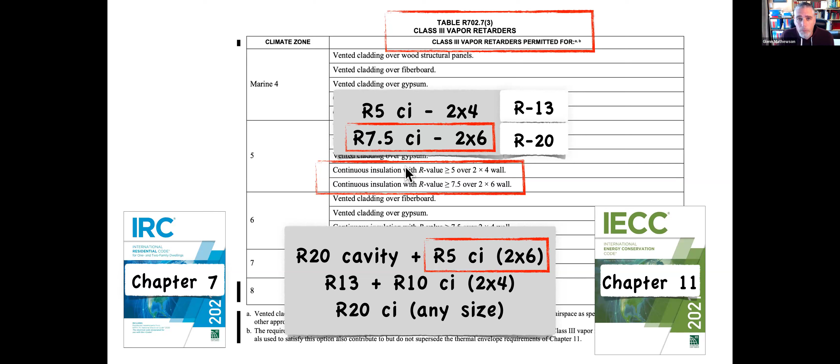No, you're forgetting—it's not one way that's the worst you can build and still be legal. You have a ton of choices for vapor control. You have a ton of choices for energy compliance, for thermal control. You have to make sure those two mesh, just like you got to make sure the thermal envelope, the thermal underwear, meshes with the exterior bib.

Who's ready to go snowboarding? It's on my mind, as you can tell.

Okay, so that's why this doesn't have to correlate, because you could use this. Let's say you do this one for vapor control, an R7.5 continuous over a 2x6 wall, assuming an R20. Then maybe in your energy code compliance, you're going to use the performance method or a trade-off method, the UA trade-off REScheck, and you're going to raise that continuous to 7.5 so that you meet the continuous required for vapor control. Then that would allow you to lower that R20 cavity. And that's not going to hurt your vapor control, because you're putting less insulation on the side where we want heat gain to the surface. So you just have to adapt your design so that both work.

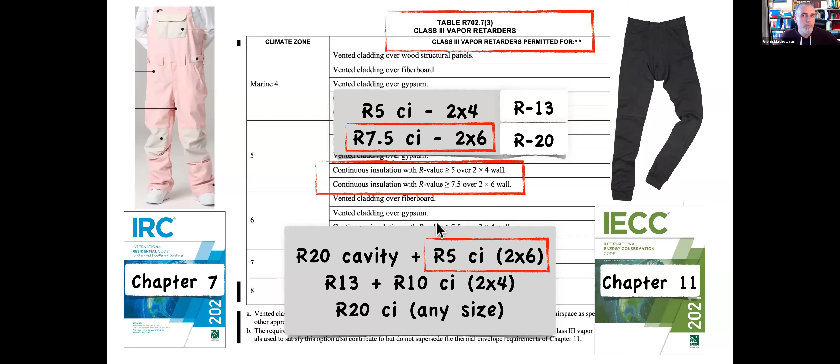Okay, so one more thing to mention, about 3 slides left here. You can also use, of course, spray foam insulation. There's all kinds of things in there that I won't be able to flesh out for you completely in this last moment—check out that on your own.

But you can utilize spray foam insulation on the inside for vapor control. This is allowed and it counts as continuous insulation. It does not count as continuous insulation when you're analyzing it for energy code, because you have the studs that are thermal bridges cutting through that spray foam. So here's another thing to understand: spray foam on the inside in between studs does count for your R value for quote continuous exterior insulation, but only for vapor—you can't look at it that way for energy code, this is a cavity insulation. But what does this do for vapor control? This is an air impermeable insulation, and that means warm, humid air is not going to be able to touch the sheathing.

And that's no longer our dew point, our condensing surface. Our condensing surface is now on the inside of the spray foam. And that's the surface we want to keep above 45 degrees, so that we don't get condensation.

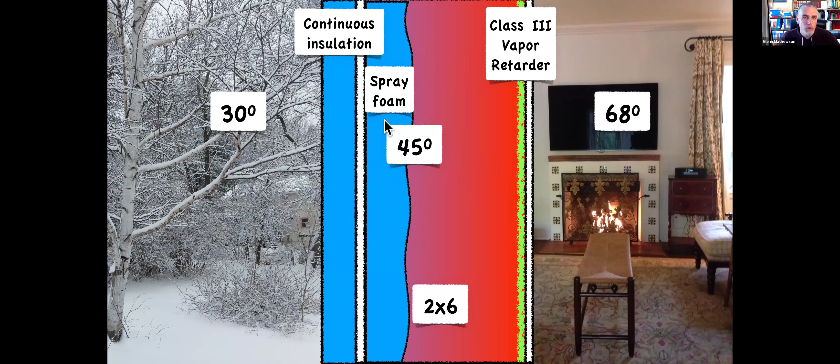When you get to the vapor control stuff, you can do just spray foam on the inside to cover your vapor control, or you can do a combination of continuous exterior and spray foam on the inside just for vapor control. Now we have to balance out the vapor control that is keeping the heat at our condensing surface, the inside of the spray foam. How do we equate that to the rest of the cavity that's blocking the heat from getting to it?

This is a 2x6 wall cavity. But do I have 2x6 worth of insulation blocking the heat from this condensing surface on the face of the spray foam? No, I don't. I really kind of have a 2x4 cavity possibly left here, right? So that's where I say, looking at these things where they refer to just the size of the studs doesn't really help us in really fully understanding the science behind all of this.

In this example, for condensation control, even though this is a 2x6 wall, I could look here at this line and go, well, hold on. For R5 continuous, I can have the combination of both of these. That's going to keep the heat from leaving this surface and keep it warm. And then I need a 2x4 worth of insulation in the cavity, no more than that, because that's keeping the heat away. Even though it's 2x6 framing, I probably only have about a 2x4 cavity left.

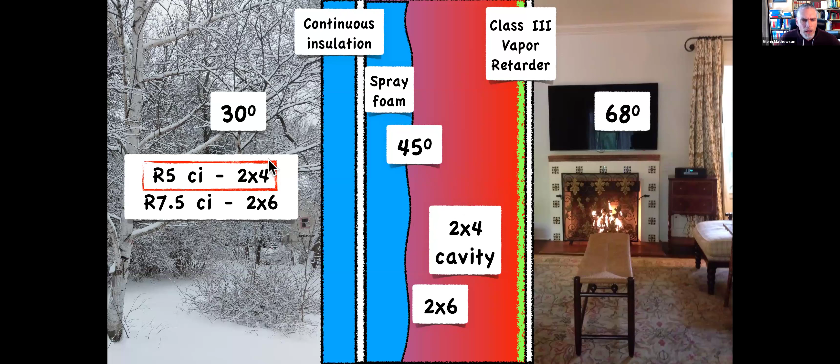So just another little nuance, a deeper understanding I wanted to point out, and why I hope in the future we'll see this vapor control codes continue to get fine-tuned and really tell the story a little more clearly to us. So same thing if we look here right now, this is for our energy code stuff.

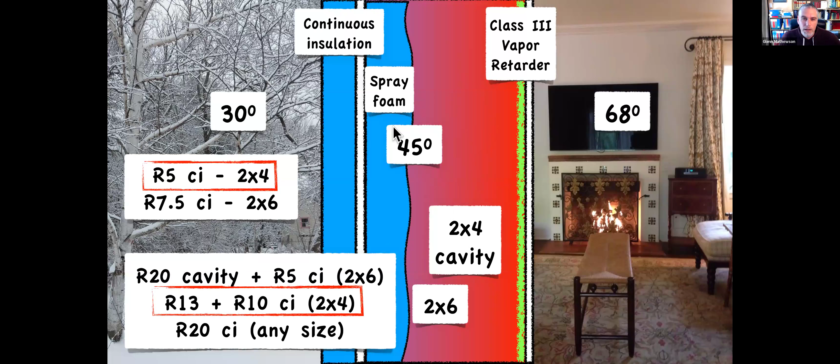For vapor control, this spray foam is part of the R5 continuous for vapor control. But when we get to energy, and we were to say, all right, for meeting thermal comfort of energy code, R13 cavity, R10 continuous, now the spray foam is considered part of cavity insulation. And so you might not be able to make this one, or you might be able to make this value here, R20 cavity, combining both insulations and your exterior.

So just important to remember that we can play around with these values just because the code gives us these easy R values to understand for energy code. It doesn't have to correlate perfectly with vapor control, because for energy code, we can trade around all of this stuff.

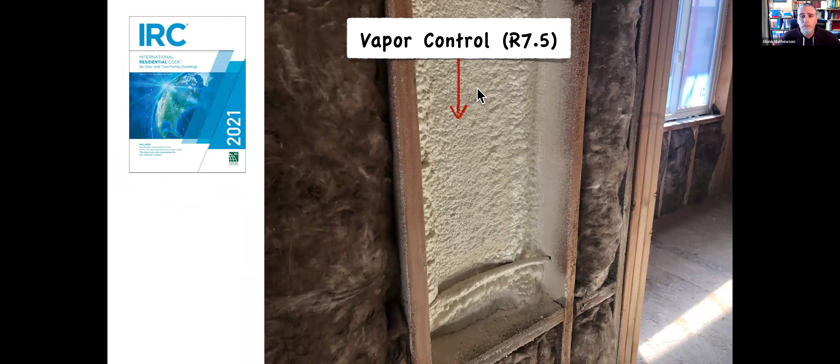So one other final reminder for this: remember, your vapor control R values serve its function for its reason. This could be done for air sealing as well. Maybe you're doing this as part of your design to get some better air sealing. But then when you come and add additional cavity insulation, like air permeable on top of that, you can add both of these together to meet up your minimum R values for the whole assembly for energy code.

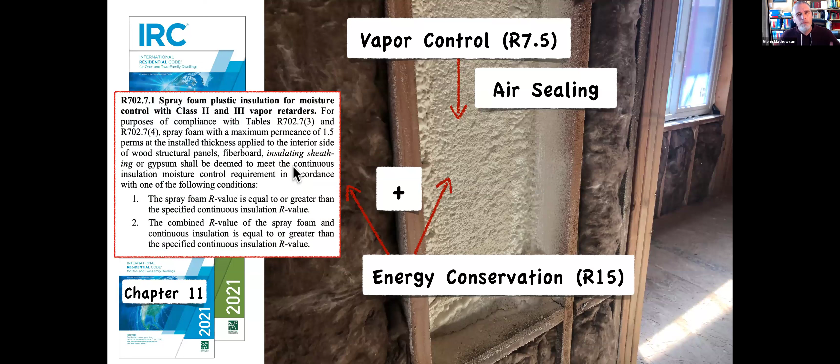And then just a reminder, definitely take a read when you use spray foam plastic. There's some other important things in here that I didn't explain to you, because I always want you to leave with more questions than answers. Hopefully you got a few answers out of this, and hopefully you leave with some things that you're curious about, and you'll go continue learning on your own.

Sorry for having a little bit longer time here. I'm talking a little faster than I wanted, but I hope you guys all did enjoy the presentation. Thanks so much.